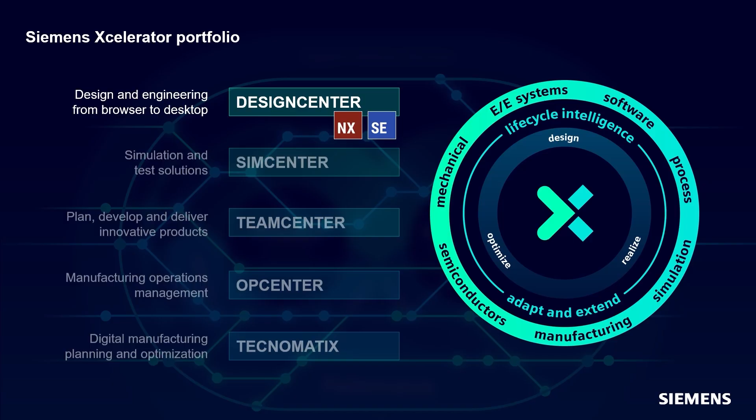Early in 2025, we announced the introduction of the Designcenter suite, which includes both NX and Solid Edge. With new releases of products within the suite, you'll see us adding Designcenter to the individual product to emphasize that they are part of a unified, comprehensive design suite, all backed by Siemens' industry-leading Parasolid kernel.

This release is packed with enhancements that embody that mission: AI-powered tools that accelerate design, major enhancements to part modeling and sheet metal, and new ways to work with large assemblies more efficiently. Designcenter Solid Edge 2026 gives you the performance, flexibility, and freedom to design smarter, faster, better.

This year's release is full of new features, and let me point out a few of my favorites. First, Designcenter X Solid Edge unlocks browser, desktop, and hybrid workflows, enabling seamless integration with our other SaaS-based products from Siemens, and allowing work from anywhere, unmatched by incumbent solutions focused only on desktop or limited cloud features.

Many of our customers have already switched to Designcenter X Solid Edge. If you haven't, now is a great time to consider upgrading to X.

Magnetic Snap Assembly brings AI-driven speed to your workflows, automatically snapping and constraining parts in seconds, making building assemblies faster, smarter, and up to 9 times more efficient.

Automatically create tabs and slots on sheet metal parts with the tab and slot command. It allows you to create perfectly matched interlocking components in seconds.

Step in your design for a whole new perspective. With the new walkthrough command, you can navigate assemblies like you're really there, using your keyboard, mouse, or even an Xbox controller. And our new dark theme reduces eye strain, enhances focus on the design, and improves visual comfort, especially during extended work sessions or low light conditions.

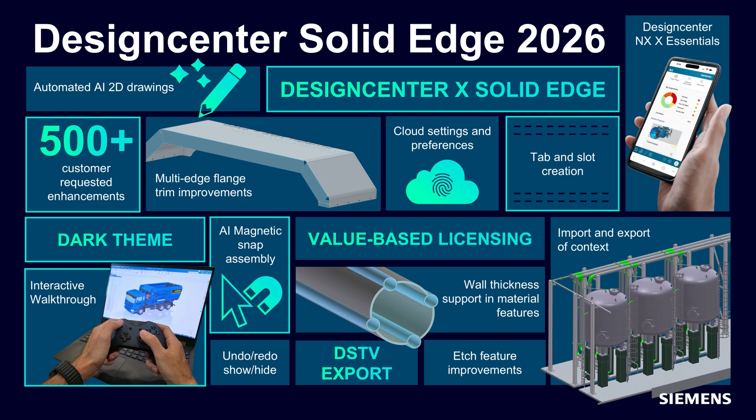With all these enhancements and new features, Solid Edge 2026 delivers real-world performance that keeps pace with how you work. Guilherme Rossi from agricultural equipment maker Siltomac put it perfectly: 'With each new release, Solid Edge becomes smarter, more connected, and more aligned with how we design.' Here's their story.

My name is Mariana Rodrigues. I serve as Director of Operation of Siltomac, a Brazilian family-owned company. Siltomac is a pioneer in designing, developing, and manufacturing equipment for livestock farmers.

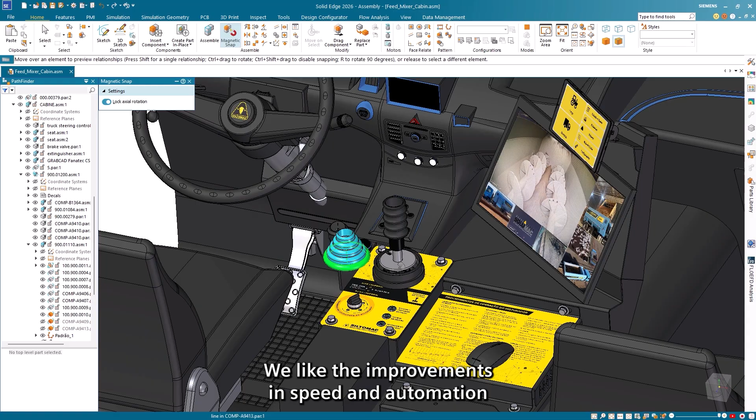The new Solid Edge 2026 looks really fantastic. We like the improvements in speed and automation, like AI-powered assembly tools. Overall, it seems like a big step forward that can really help us be more productive and innovative.

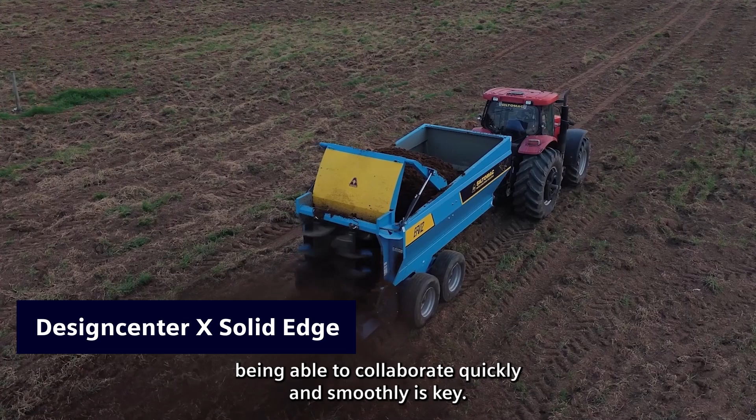Working in a fast-changing market, being able to collaborate quickly and smoothly is key. With Designcenter X Solid Edge in the cloud, our team can access the latest design anytime and anywhere. For us, saving time in assembly design is huge.

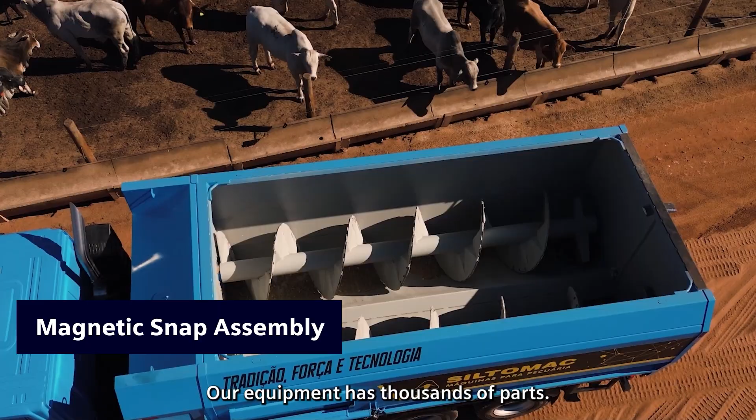Our equipment has thousands of parts. Putting them together takes a lot of effort. AI-driven magnetic snap can speed up assembly by several times. It means our engineers can finish design faster and start testing earlier. We can respond to customer needs and stay ahead of the competition.

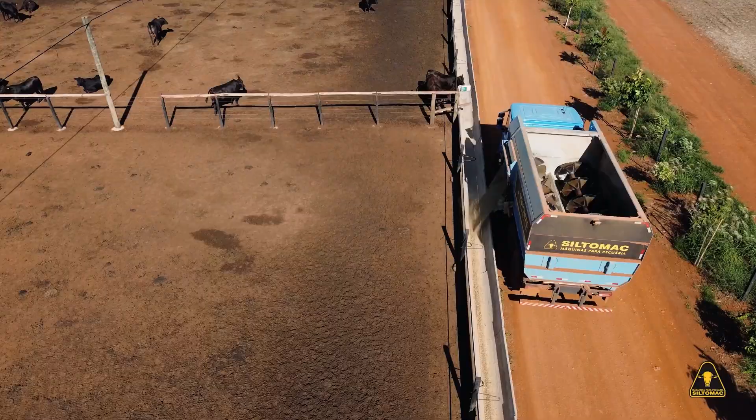Our demos used throughout this video will focus on Siltomac's 25.7 RR feed mixer, which was designed using Solid Edge. It's built to make feeding smarter, delivering up to 98% uniform mixing to ensure every animal gets the same balanced meal, keeping herds healthier and farms more efficient.

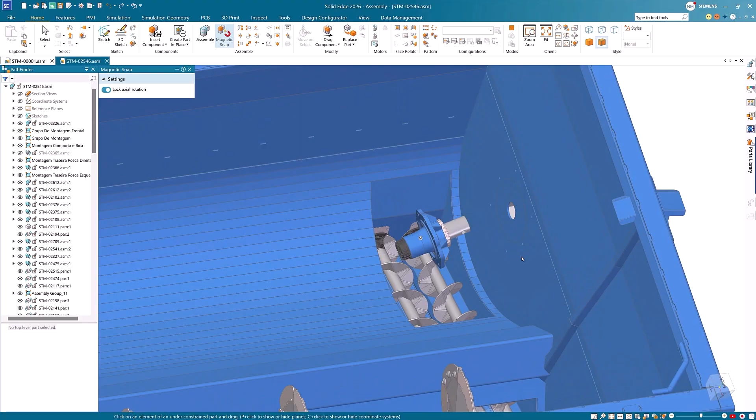With Designcenter X Solid Edge, we have seen how your design can adapt to where and how you work. This year's release takes it a step further by adding intelligence that adapts to the way you work. Artificial intelligence is now built right into the tools you use every day. It's about saving you time, cutting out extra clicks, and keeping your designs moving forward without any interruptions.

For example, you will soon see how AI speeds up assemblies, snapping components into place and automatically detecting the right constraints so you don't have to.

And when it comes to documentation, AI helps there too. The new automatic drawing tool takes care of the heavy lifting so you can spend less time setting up drawings and more time designing.

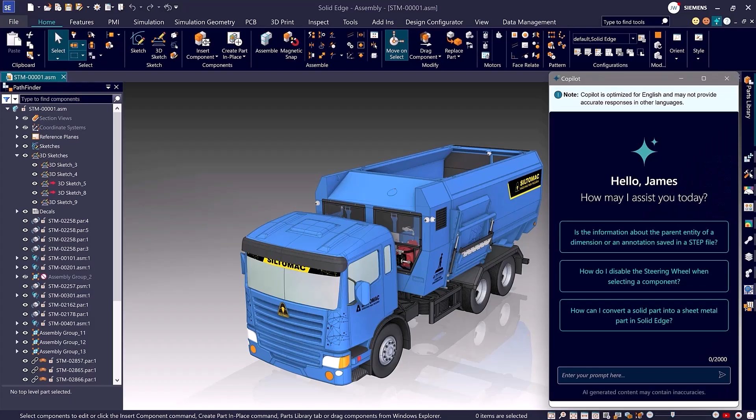But AI isn't just about automation, it's also about guidance. Inside Designcenter X Solid Edge, the new AI Copilot is always available to answer questions, suggest tips, and guide you in real time. Need to know how to change a setting or try a new command? Just ask. Copilot helps you keep moving forward without breaking your flow.

With AI in Solid Edge 2026, the goal is simple: help you work smarter, not harder, whether you're building assemblies, creating drawings, or just looking for quick answers in the moment.

When you're managing big assemblies, every click counts. Designcenter Solid Edge 2026 is all about saving you time, keeping things clear, and helping you design with confidence.

Let's start with magnetic snap. This is one of those features you'll wonder how you lived without. Powered by AI, it automatically recognizes the right mates as you drag parts into place.

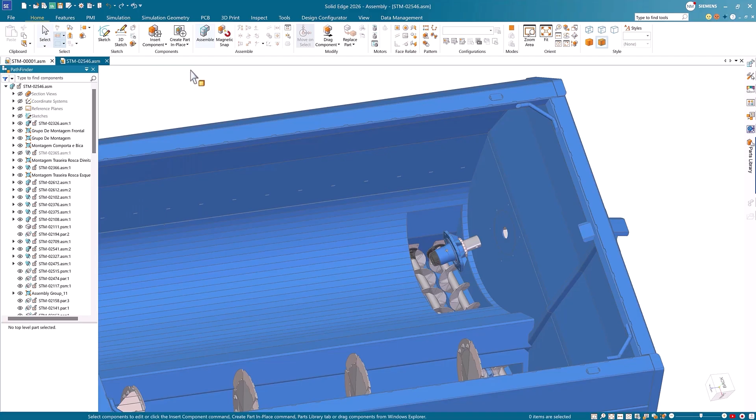In this example, we're missing an auger in its base. Instead of setting each constraint manually, we can just drag the edge of the base to the hole, and Designcenter Solid Edge applies both a planar and an axial constraint in one move. Then we bring in the auger subassembly and snap it in the same way. It's faster, easier, and just feels more natural.

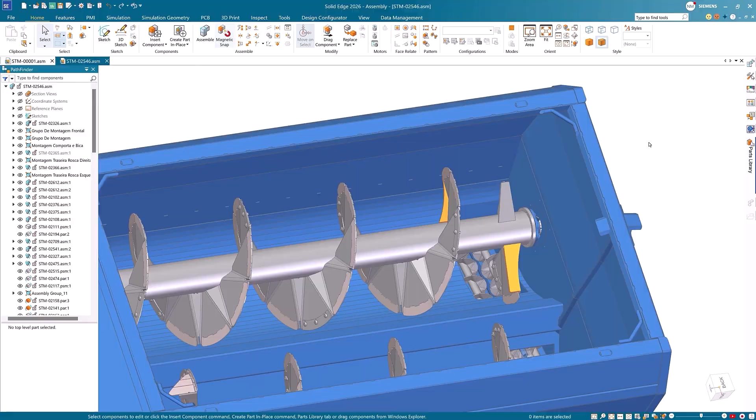We've also made display configurations more powerful, giving you multiple ways to show the same part or assembly without duplicating files. Here I've got three variations: one with just the sketch, one with an etch, and one with a decal. We can toggle elements on and off to build new configurations with just a few clicks, all without altering geometry.

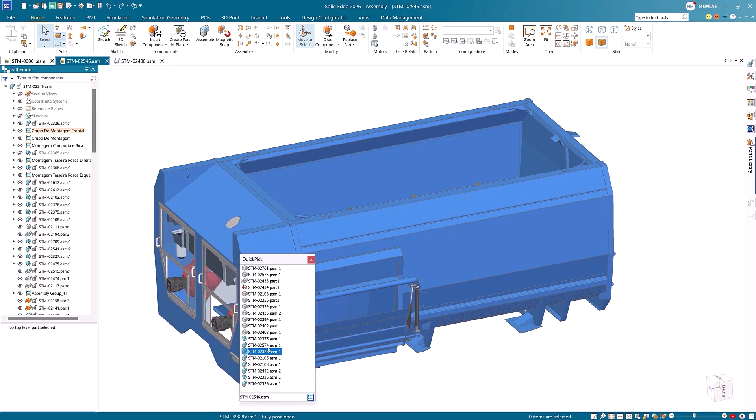Exploded views are better too. You can now save them as display configurations, so once you build it, you can reuse it anywhere, whether that's for documentation, presentations, or clearer communication with your team. It's a cleaner way to show how parts come together or come apart without having to redo the work each time. For this side panel, we'll switch the default configuration to the one with a decal.

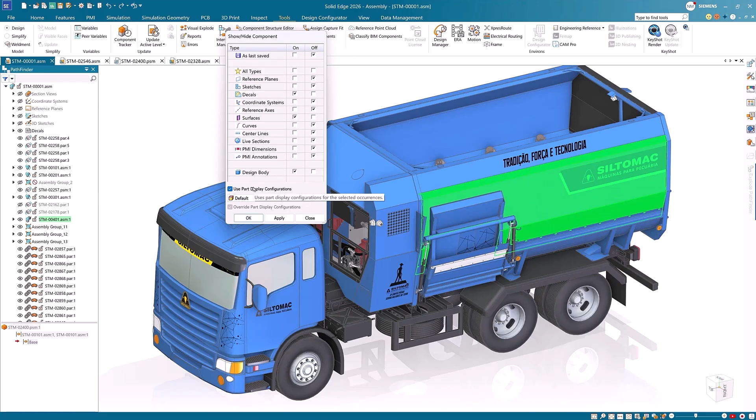Part copy also gets an upgrade. Say we need a mirrored side panel. Instead of starting from scratch, we can copy the existing panel and bring along the coordinate systems, sketches, and reference planes. That gives us the context we need to place it exactly where it belongs.

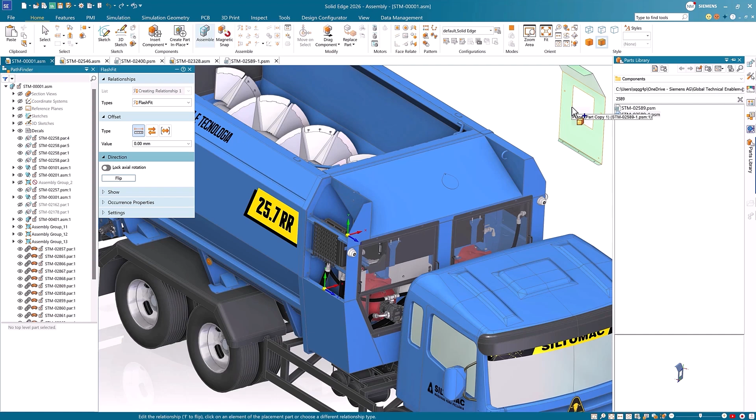Then, using matched coordinate systems, we can snap it into place. And since the copy is associative, if the original changes, the mirrored one updates automatically. It saves a lot of rework and keeps everything aligned.

All of these updates, magnetic snap, smarter display configurations, reusable exploded views, and enhanced part copy, are designed to take the friction out of assembly work. They free you up to focus less on clicking through constraints and file management, and more on designing with clarity and confidence.

Of course, it's not just assemblies that are improved in Designcenter Solid Edge 2026. Parts and sheet metal design have some great new features too, things that cut out extra steps and make sure your designs are ready for manufacturing.

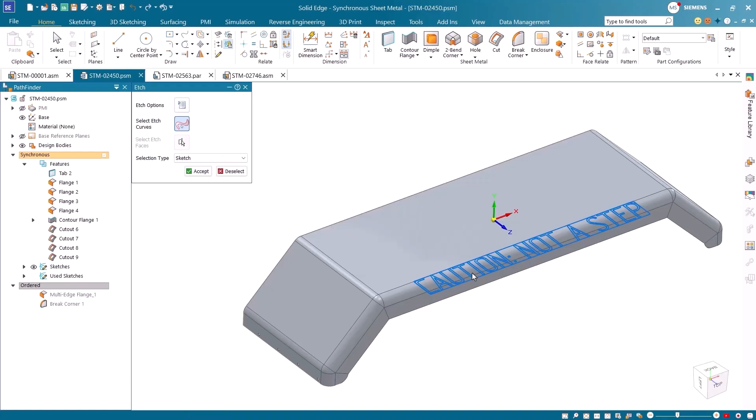First, expanded etching. You can now apply etches directly to bends and curved surfaces in both ordered and synchronous environments. Here, we'll add an etch to a bend face. The great thing is, if the model changes later, the etch updates automatically, so you keep precision without rework.

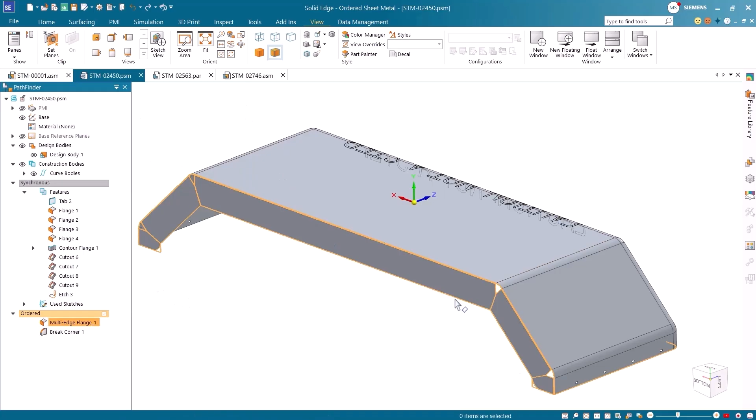Sheet metal flanges also get a big upgrade. When you create flanges across multiple edges, Solid Edge now handles trimming and mitering automatically. That means cleaner corners, less manual adjustment, and more consistent results. Here we've applied flanges to multiple edges at once. Notice how the system builds in the correct cutbacks automatically.

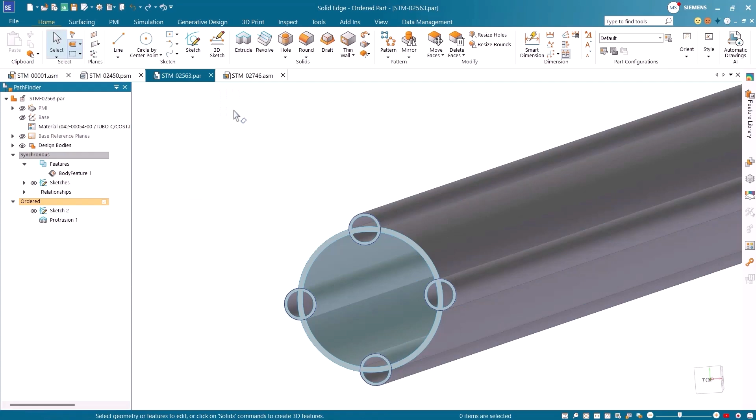Next, thin-walled components are easier than ever. With new wall thickness support and add material options, you can hollow out features in one step, with full control over wall thickness and thinning direction. The system even handles end caps and internal material removal automatically. What used to take multiple operations now happens in a single, seamless command.

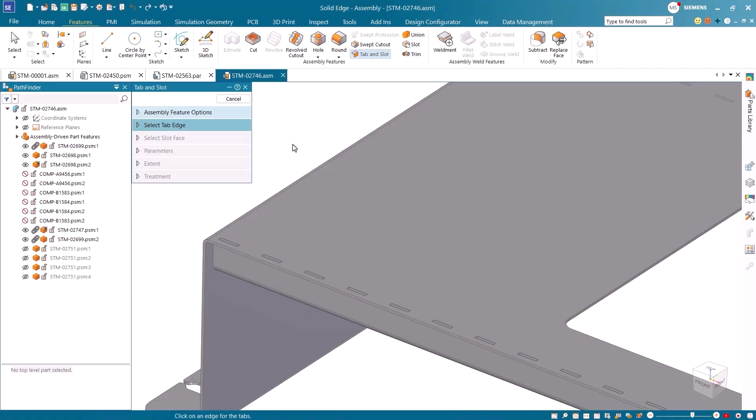Continuing the theme, the new tab and slot command takes what was once a manual, time-consuming process and makes it automatic. Create perfectly matched interlocking components in seconds, whether working with single parts, multi-body parts, or assemblies. This intelligent automation enables precise alignment, supports temporary fixtures during welding, and simplifies manufacturing. It's precise, reliable, and a big time saver.

All of these updates, etching on bends and curves, smarter flange trimming, easier thin wall creation, and automated tab and slot, make part and sheet metal design more efficient and your designs more manufacturable. They reduce repetitive steps, improve accuracy, and give you the confidence to move from design to production faster.

Sometimes the best way to understand a design is to step inside it. Design isn't just about creating models, it's about being able to experience them. And with Designcenter Solid Edge 2026, you can step inside your assemblies in a whole new way.

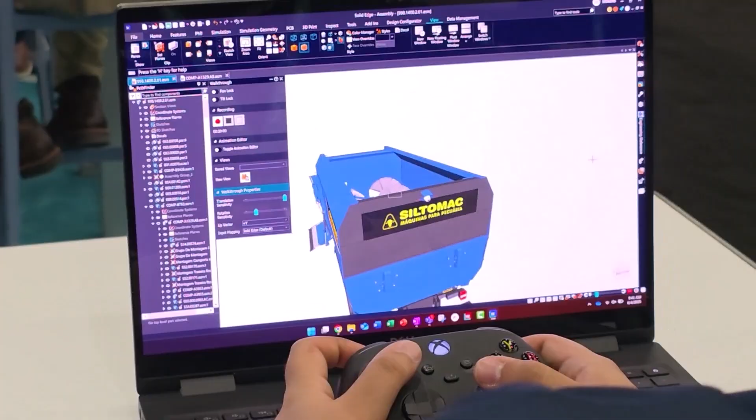The new walkthrough command lets you navigate your design like you're really there. Think of it as a first-person view of your model. You can move around with keyboard, mouse, or even an Xbox controller, whichever feels more natural. It's like a video game, but only the world you're exploring is your own Solid Edge design.

And because traditional tools make it tough to review large models up close, walkthrough makes those design reviews and presentations feel more natural, immersive, and easy to share.

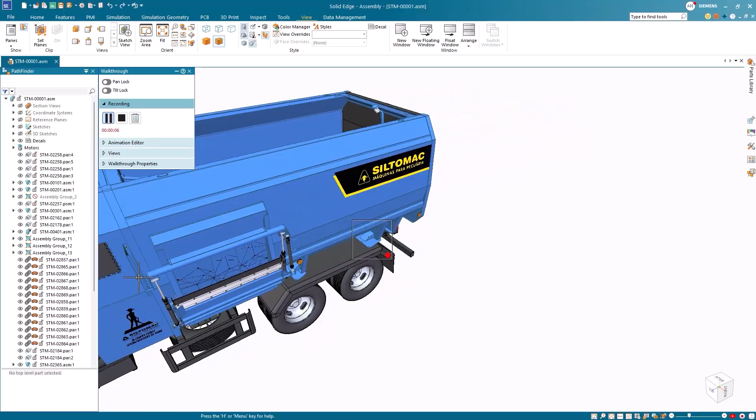But it's more than just moving through a model. You can also record paths and bring them into the animation editor to create smooth fly-throughs. From there, you can export them or take them into KeyShot for high-quality visuals.

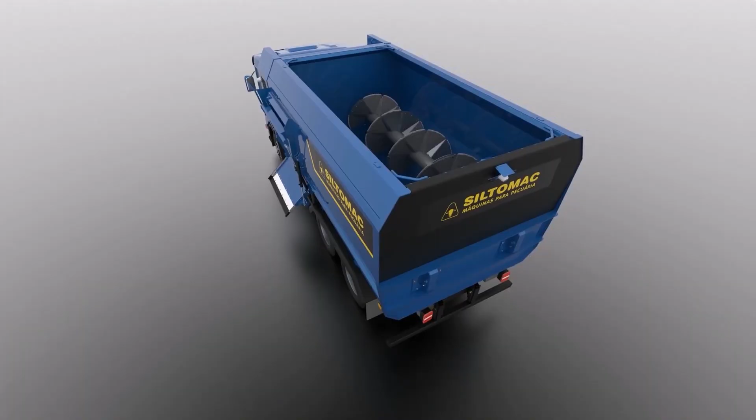That makes it easy to build dynamic presentations, run design reviews, or simply share your vision in a clear and engaging way. With Walkthrough, Solid Edge 2026 gives you a new perspective on your designs, helping you spot details, communicate ideas, and bring your work to life.

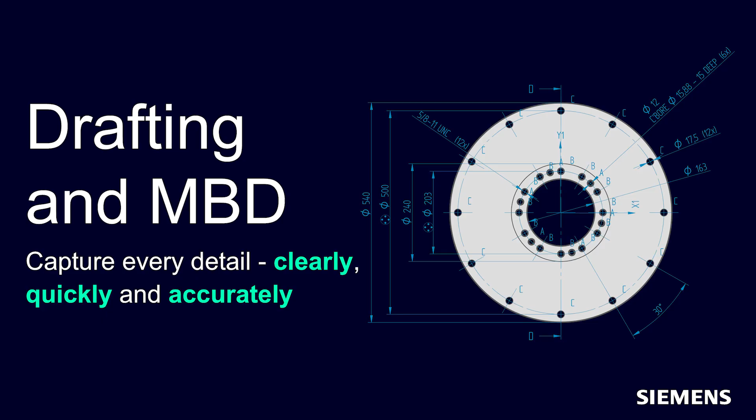Design isn't complete until it's documented, and Designcenter Solid Edge 2026 makes that part of the process faster, clearer, and a lot less tedious with enhancements to drafting and model-based definition that transform how you create, manage, and share engineering documentation. First, we've added AI-powered automatic drawing generation.

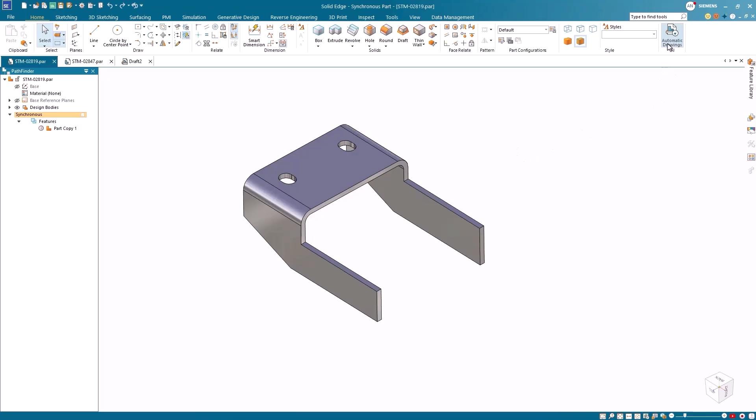This creates 2D drawings that are already 70 to 80% complete the moment you start, with intelligent view placement, dimensioning, and template selection built in. Orthogonal, broken, and isometric views are handled while staying aligned with your drawing standards. You still have full control to adjust before finalizing.

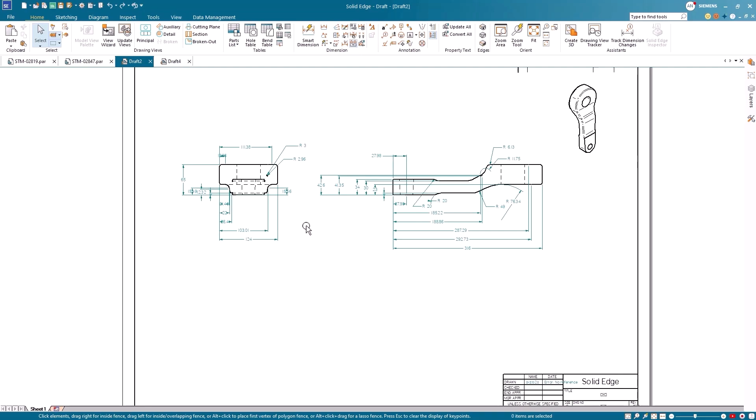This streamlines what has traditionally been a very manual process, saving time on repetitive setup and making it easier to keep drawings consistent, even when you're handling a high volume of parts.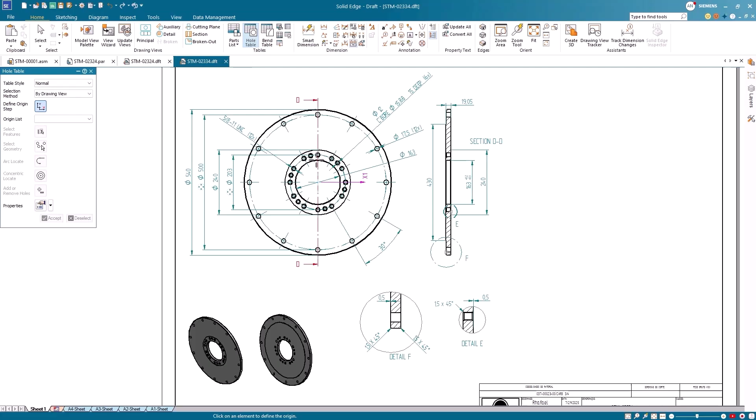You can now add your own custom symbols in both 3D PMI and 2D drawings, which makes it easy to standardize communication across teams. Hole tables have also been improved. They now pull in fit class and tolerance automatically, so critical specs are documented quickly and precisely.

And for visual clarity, decals are now visible in shaded drawing views. That makes shop floor communication easier and helps reduce inspection errors. The new mid-plane reference plane feature simplifies complex geometry documentation with single-click creation, ensuring everyone from design to manufacturing sees exactly what they need.

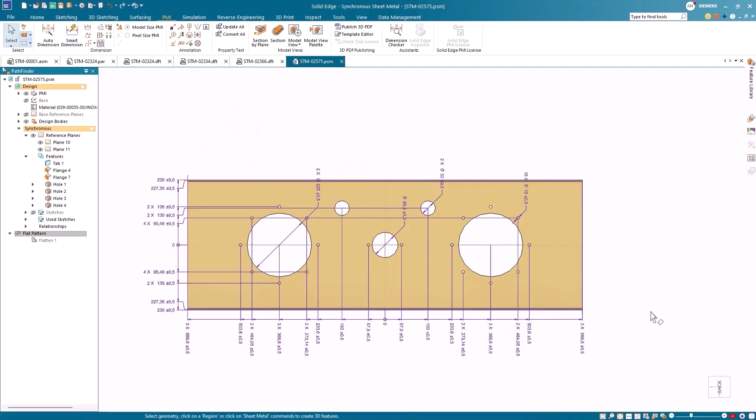For teams moving toward model-based definition, we've expanded 3D PDF support. You can now export multiple section views for parts, sheet metal, and assemblies. These 3D PDFs also support JT and STEP, making it easier to share internal design details with downstream teams and external partners.

All of these updates, AI-generated drawings, automatic revision tracking, custom symbols, hole tables, and smarter 3D PDFs, are designed to help you capture every detail clearly, quickly, and accurately. Whether you're on the shop floor or working with a supplier, Solid Edge 2026 makes sure everyone sees exactly what they need.

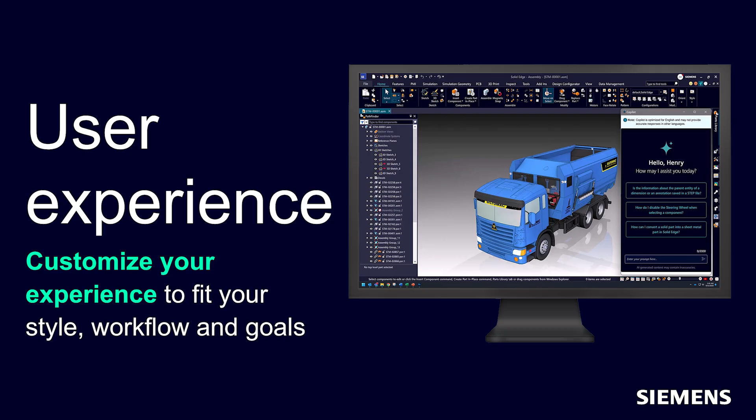Design isn't one size fits all, and neither is Designcenter Solid Edge 2026. It gives you more flexibility than ever to make the software work the way you want it to.

Let's start with one I know a lot of people are excited about, dark theme. At this year's beta testing, it was a star. It not only gives the interface a sleek look, but also makes it easier on your eyes, whether you're working in bright daylight or late at night. By cutting down glare and reducing eye strain, dark theme helps you stay focused longer, letting your design stand out without all the visual clutter.

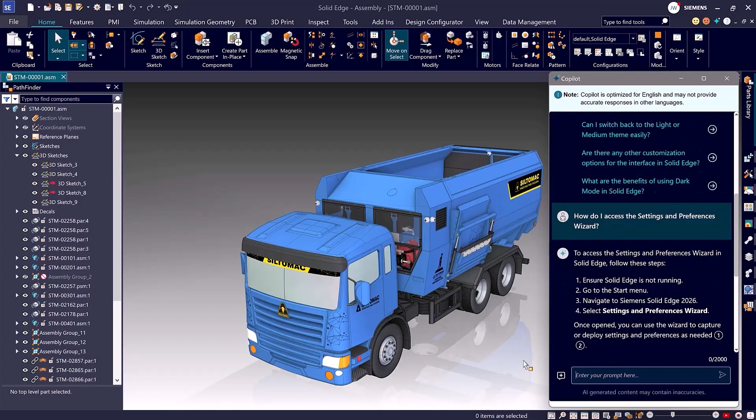If you ever forget how to switch, the AI Copilot is right there to guide you. Copilot also connects to cloud-based preferences, so your setup follows you wherever you go. That means whether you're at the office, at home, or working on the move, your shortcuts and configurations come with you. It's design freedom without the hassle of having to reset up your preferences.

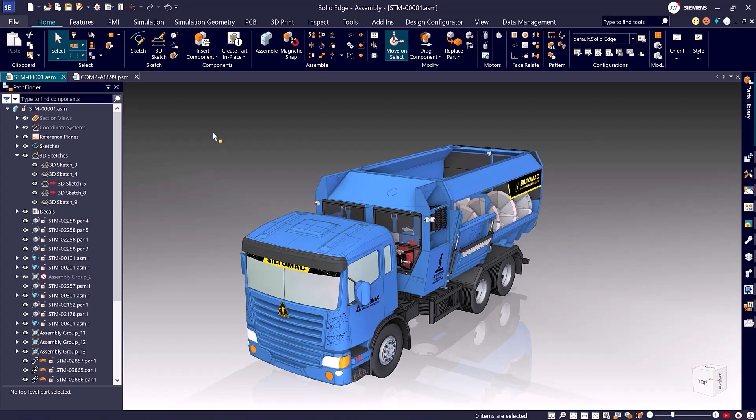Little things make a big difference too, like undo and redo support for show and hide commands. When you're deep in a big assembly and accidentally hide the wrong part, you don't have to panic. Just click undo. Simple, flexible, and a huge time saver.

The parts library is also more flexible. You can add, remove, and reorder columns, just like in Windows Explorer, so it matches how you work, making managing large assemblies and metadata faster and more efficient.

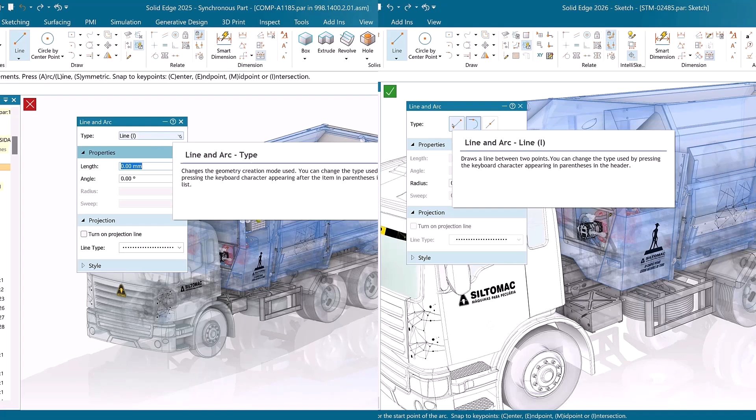And with redesigned vertical command bars, all your go-to tools are easier to reach. Frequently used commands like circle, rectangle, line, arc, and blend now feature intuitive icons. No drop-downs, no clutter, just faster modeling with fewer clicks.

And sometimes it's the little quality of life things that make your day. The new Close All Files command gives you a clean slate with just one click, perfect when you're juggling multiple projects.

Solid Edge 2026 is all about giving you control over your workspace, from dark theme and command bars to expanded undo support and cloud-safe settings. Solid Edge adapts to your style, your workflow, and your goals, so you can spend more time designing.

We've talked about customizing Solid Edge to fit your style and workflow, but flexibility isn't just about how the software looks and feels. It's also about how you access the tools you need exactly when you need them.

That's where value-based licensing comes in. Instead of committing to every add-on up front, you can use tokens to unlock advanced capabilities on demand. Think of it as a flexible toolkit, the freedom to explore powerful options without a long-term commitment, all while keeping your budget predictable.

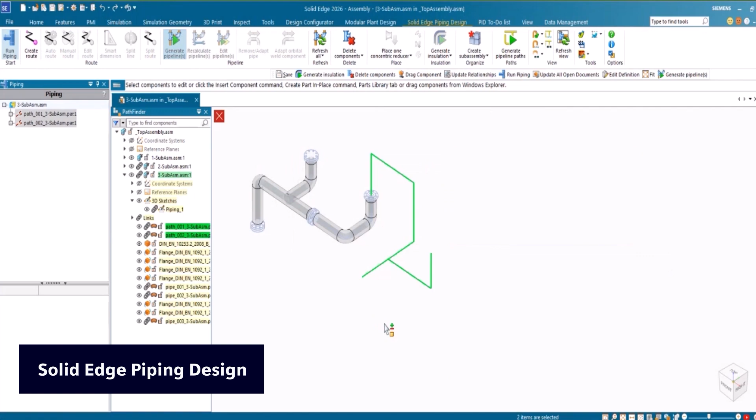Solid Edge Piping Design: build piping systems quickly and accurately, with automated routing tools that cut out manual steps. Solid Edge P&ID Design: create intelligent piping and instrumentation diagrams that connect directly to your 3D models for consistency and accuracy.

Solid Edge Design Configurator: automate repetitive design tasks by creating rule-driven configurations in seconds.

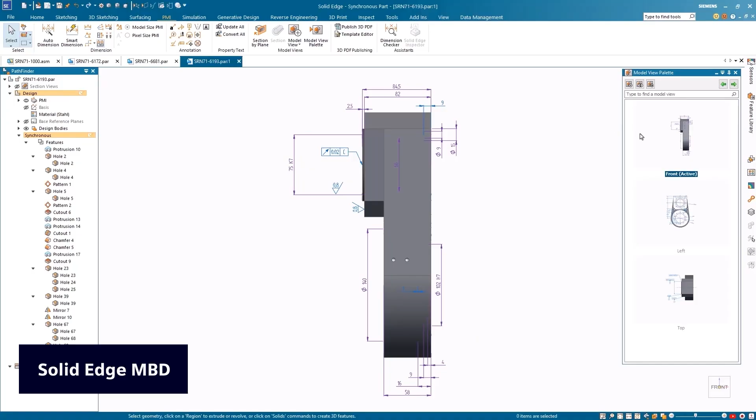Solid Edge MBD: move toward model-based definition with tools to embed dimensions, annotations, and notes directly into 3D models.

DSTV Export: streamline steel fabrication with direct output for saw, drill, and flame cutting machines. No third-party conversions required. We'll discuss this more in a few minutes.

Solid Edge Inspector: speed up inspection workflows with tools to automatically generate inspection reports, balloon drawings, and manage compliance checks.

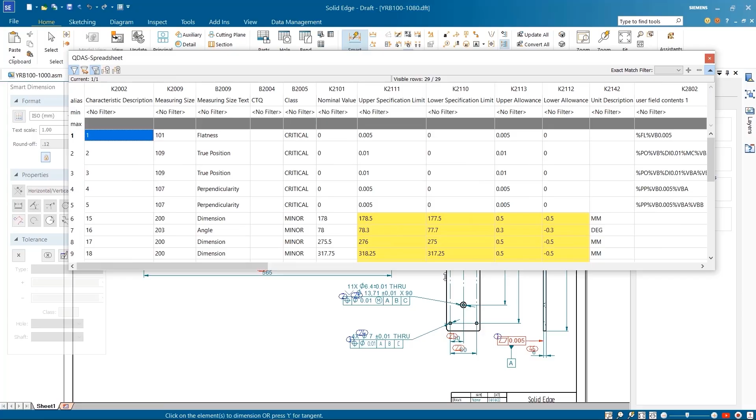Whether you're solving a one-time challenge, testing out new capabilities, or scaling your team's skills, value-based licensing makes it easy. It's about giving you the freedom to grow at your own pace, explore new possibilities, and get more from your investment in Solid Edge.

Solid Edge gives you incredible power on the desktop, but what about times when you're not at your desk? That's where NX Essentials comes in.

It's a lightweight, browser-based companion, delivering essential CAD, CAM, and CAE that works right alongside Solid Edge, giving you the flexibility to keep designing, reviewing, and collaborating anywhere.

Because NX Essentials shares the same Parasolid kernel, your Solid Edge data flows straight in, no translations, no workarounds. That means you can open models directly in the browser, make quick edits, and create drawings on the fly.

Picture this: you're in a customer meeting and need to adjust a design on the spot. NX Essentials lets you do it.

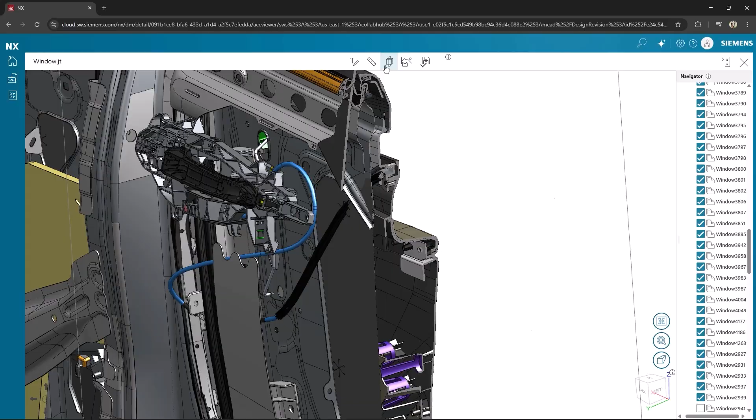Or maybe your production team catches something on the shop floor. Instead of sending it back upstream and waiting, they can open the model, make a small tweak, and keep things moving. Even non-CAD users can pull up the latest design, mark it up, or create visuals without pulling engineering off task.

And customers are already seeing the benefit of pairing NX Essentials with Solid Edge. Take Bowstone metal fabrication, for example. They've been using both tools together to transform how they design, collaborate, and deliver.

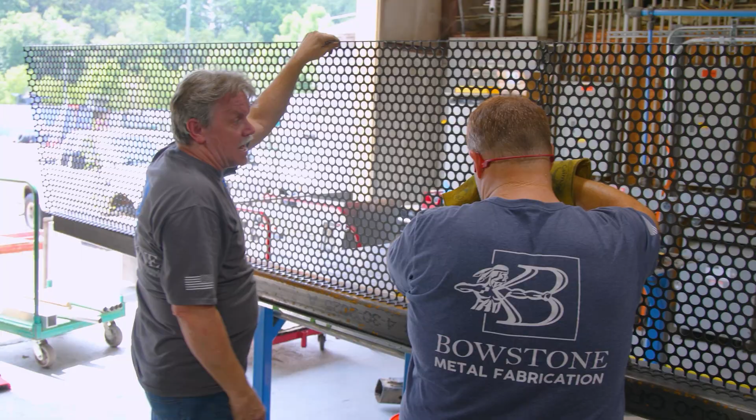When we started out, we were managing our customers through spreadsheets and emails and stuff like that, and it was brutal. There was a lot of heartache, a lot of dropped balls, and we couldn't deliver how we thought we should deliver. Our customer service wasn't there.

NX Essentials has been amazing for us. When we found that product, it changed our whole world. We were able to communicate and collaborate with our customers, our vendors, our staff, and manage projects, parts, deliveries. It's been a game changer for us.

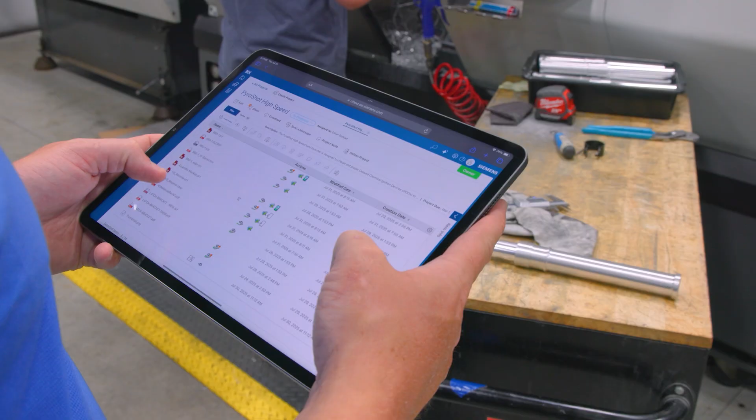NX has given us a huge competitive edge just because now we're able to collaborate like no other company around here. There used to be a lot of questions from the team. Now anybody can go back there. They all have access to it.

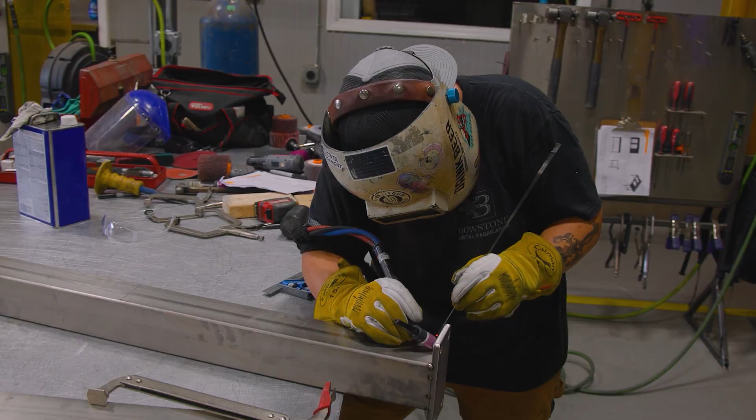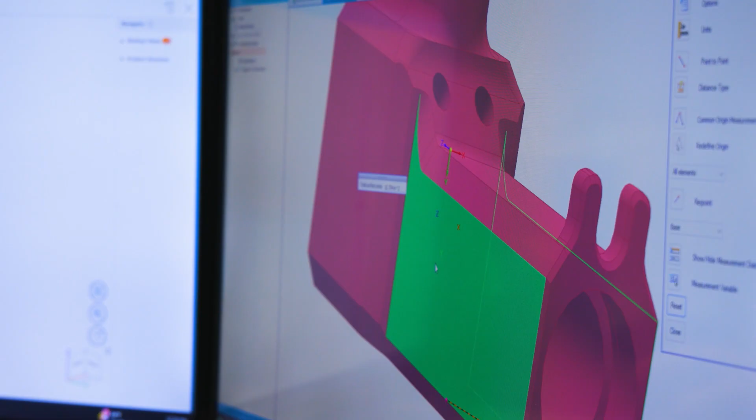The welders have access. They can pull up a 3D model. They're not looking at a PDF drawing on a piece of paper. It gives us all the capability of 3D mock-up and looking at it, and we can share it around the whole facility, and back and forth with customers. They can open it up, see it in 3D, rotate it, edit certain parts of it, and really see more than just what's on a 2D print paper. It's a great tool to have.

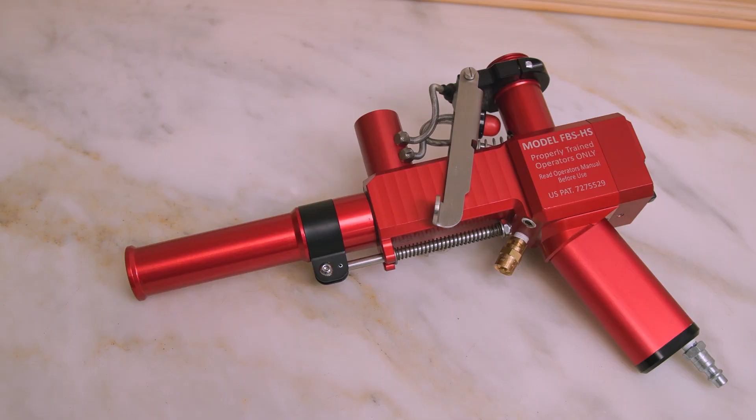My name is Jordan, I'm with Field Support Services. We're the manufacturer of the PyroShot, a ground ignition tool made to dispense delayed chemical ignition spheres in order to start prescribed fire. NX Essentials has been great given that we don't have the programs locally installed on our computer. We're able to just log into the system, upload our files, and they just work.

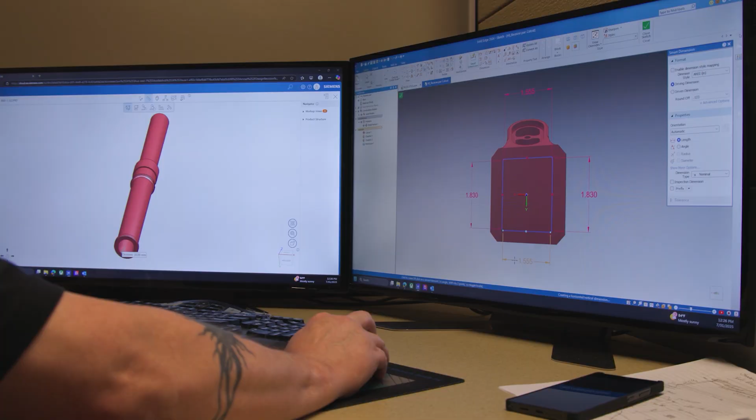I can move it around in a 3D space. Using NX with Solid Edge has worked out well for us because with the Hellfire project in NX, we were able to have the customer approve each step along the way, and then our engineering team immediately pulled those files back into Solid Edge, changed them, and we were off and running.

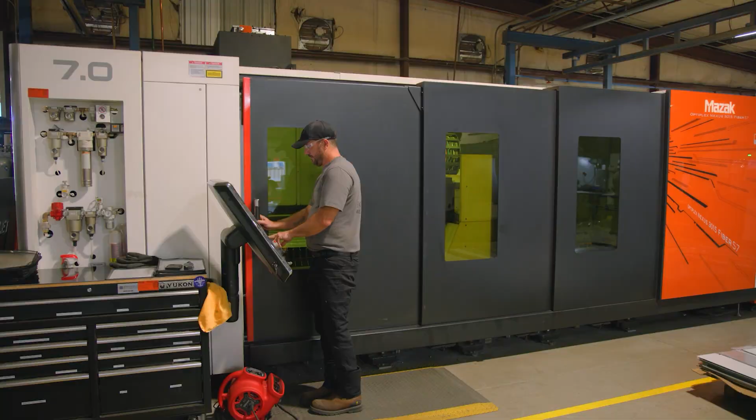Maintaining a high-tech environment at Bowstone is our future, and that's what we're striving for. That's what's helping us grow. Fortune 50 manufacturers are coming here and wanting to use Bowstone. It isn't because we have the biggest building in the world. It isn't because we have the most employees in the world. It's because we're the most adaptive to technology and able to fill their needs.

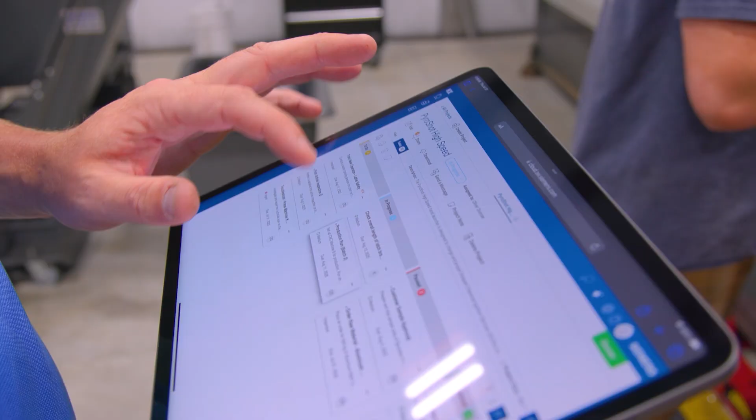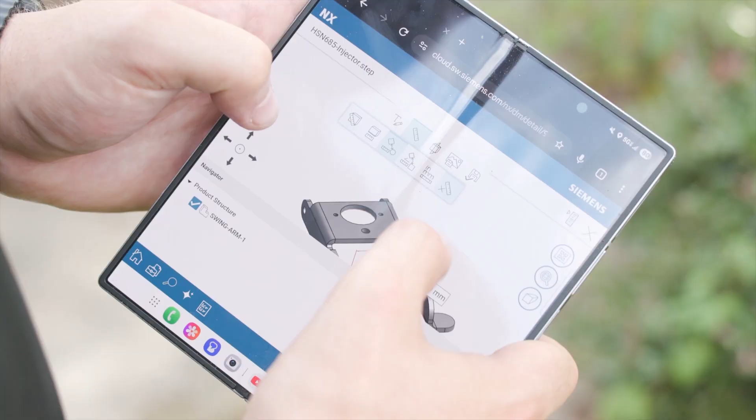Bowstone's story is a perfect example of what happens when you combine the power of Solid Edge with the flexibility of NX Essentials: faster decisions, clearer communication, and a team that can contribute from anywhere. That same advantage is ready for you too.

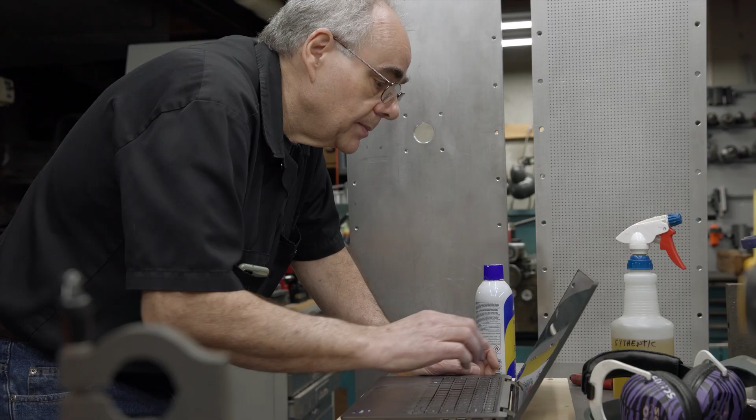And that's the real power here. It's not just for designers. Managers can review and approve on the go. Production teams can catch and correct issues right on the shop floor. Suppliers can securely access and collaborate without installs or IT headaches. Even sales and marketing can pull up the latest models to support pitches and campaigns. NX Essentials makes design data useful to everyone, keeping your whole organization connected.

Working with design data is rarely simple. It comes from different sources in different formats and often has to go through a lot of different hands, departments, and software tools. Designcenter Solid Edge 2026 makes that process more reliable and a lot easier to manage.

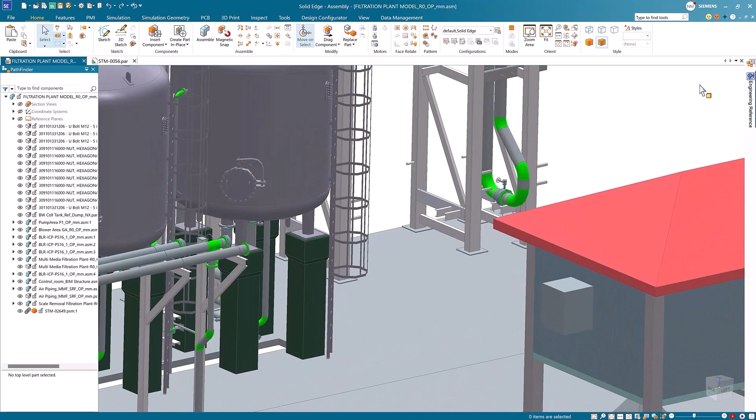First, let's talk about steel fabrication. We've added direct DSTV export, so structural steel models can go straight to CNC saws, drills, or flame cutters without workarounds or third-party tools. Profiles work without conversion issues, and export can be automated through macros in batch operation. It reduces extra steps and makes the path from design to fabrication much smoother, especially in automated manufacturing systems.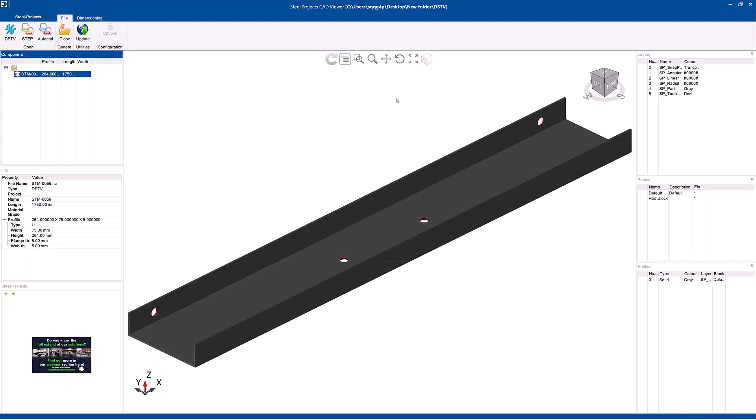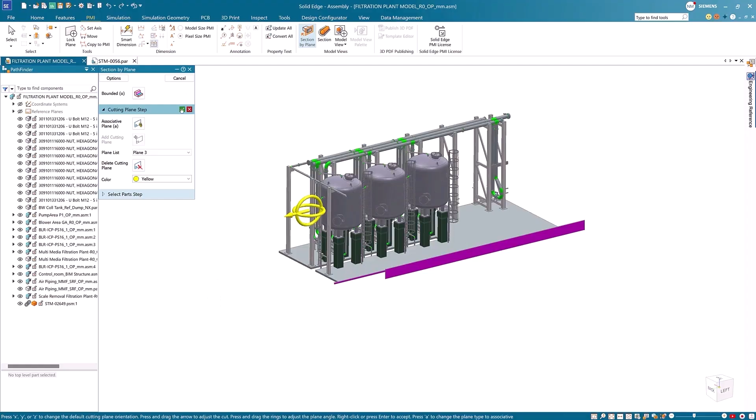Now let's look at section geometry for translation. This new option lets you control exactly what gets shared when you export. Instead of sending an entire model, you can use a section view to define just the portion you want. When exporting to STEP, you can now choose to export only section bodies. This removes non-essential components, reduces file size, and ensures recipients see exactly the geometry you want them to.

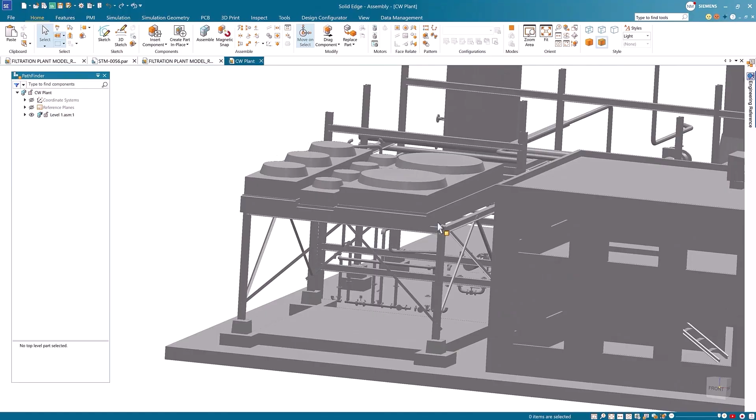Finally, Designcenter Solid Edge 2026 can now open and import Autodesk Revit files. Files can be inserted directly into assemblies or opened as separate components. Configurable settings control stitching, conversion, and geometry handling while maintaining data fidelity. This enables manufacturing designers to work directly with architectural data, ideal for equipment layout and infrastructure projects.

All of these updates—DSTV export, smarter section translation, and Revit import—make data reuse more trustworthy. Whether you're collaborating across disciplines or moving data from one system to another, Designcenter Solid Edge 2026 helps you stay connected, accurate, and in control.

Wow, what a great look at Designcenter Solid Edge 2026. A big thank you to Suda, Ben, Laura, Manny, Matt, and Shannon for showing us what's new this year. It's always exciting to see how the team brings these capabilities to life.

Designcenter Solid Edge 2026 is packed with enhancements, from AI-driven tools like magnetic snap and automatic drawings to powerful updates in sheet metal, parts, walkthrough, and our newest solution, Designcenter NX X Essentials. Each one is designed to save time, reduce hassle, and give you more flexibility in how you work.

We feel like Solid Edge 2026 is truly one of our strongest releases yet. Not just because of the new features, but because of how they all connect to make your daily work easier and more productive. It's a release that really reflects what our customers have been asking for.

And there you have it. Designcenter Solid Edge 2026 is here, and we think it's our best release yet. The only thing left is for you to dive in and make it yours. From Dan and the rest of the team, thank you for joining our launch of Designcenter Solid Edge 2026.